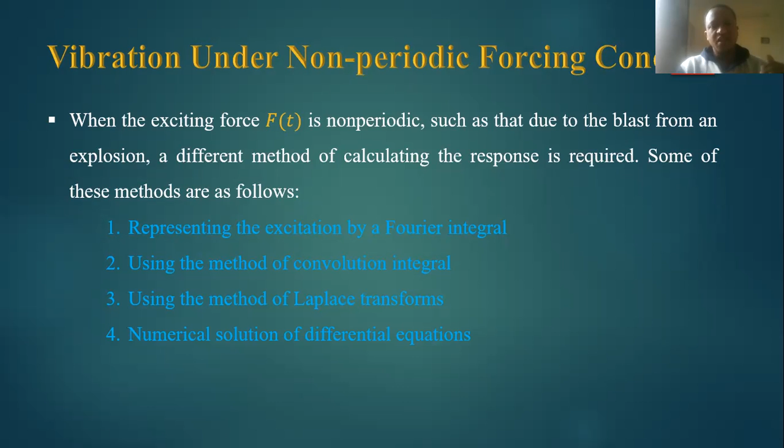Let's see. In our previous case, especially for the regular forces, we have seen the Fourier expansion. We used the Fourier integral method, and we implemented the Fourier cosine and Fourier sine solutions for the solution of the force. So this is a review of the previous lecture, one slide review.

When we see the periodic force, any general wave can be represented as a Fourier series, which is a superposition of harmonic components of various frequencies. For example, this is the force: mx dot dot plus cx dot plus kx is equal to f of t. This is a general equation of motion.

We also have a Fourier expansion, that f of t equals a naught over 2 plus summation of ai cos(I omega t) for I from 1 to infinity, plus bi sin(I omega t) for I from 1 to infinity. This is the Fourier expansion. This is the constant part, this is the sine and cosine part. So this is one of the representations for the harmonic component.

So the response of a linear system for this equation is found by superposing the harmonic response of each excitation. Here we can see this for two different cases: one is first order system and second is second order system.

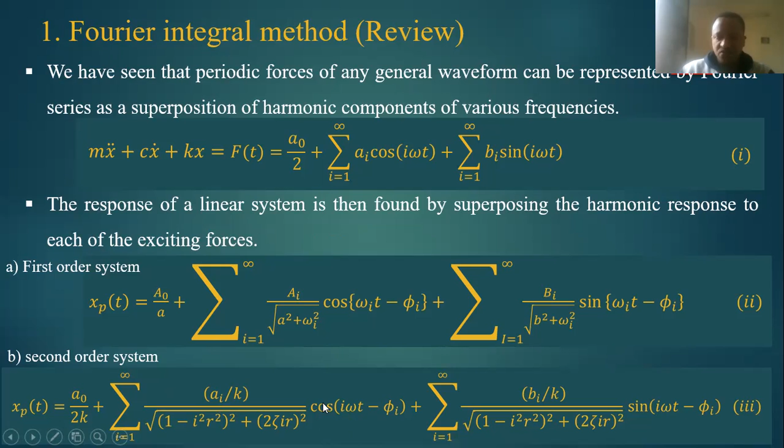So for a damped second order system, this is the solution for the periodic force case. But most of the time, the force is not periodic, it is non-periodic forces. For non-periodic excitation forces, usually the magnitude varies with time, meaning there is a change in magnitude as time goes. So for such a case, we use the convolution integral method.

The convolution integral method is the one which we use especially for the case of impulsive forces. The simplest form of this type is impulsive force, a force that has large magnitude F, which acts in a very short period of time — that kind of momentum. An impulsive force is a large magnitude of force within a short period of time, where delta t is very small.

Let x1 dot and x2 dot denote the velocity of the mass m before and after the application of the impulse f of t. Let's see some relation: F of t equals f delta t. This f of t is the impulse. We can represent this by I, no problem, or we can use a kind of p. So f of t is equal to f delta t.

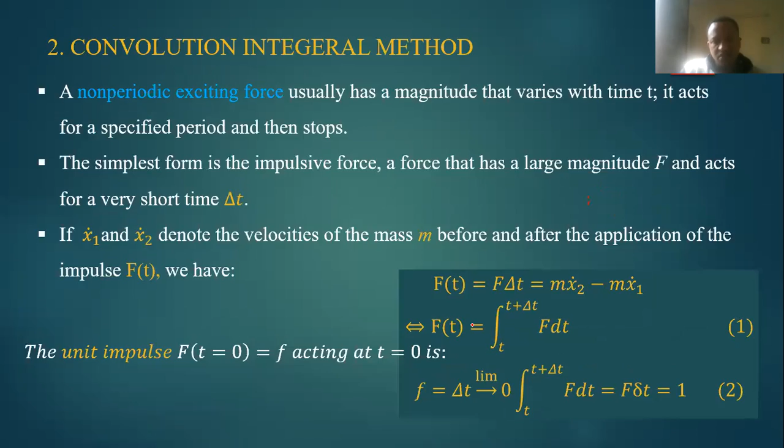There is some disturbance, it is because of my computer problem.

If the magnitude of impulse is represented as I, or we can simply take it as f of t, just f, then our x dot naught is equal to f over m. We can substitute it in the equation. So x of t equals f over m omega d, e raised to minus zeta omega n t, sine omega d t, which is f times g of t.

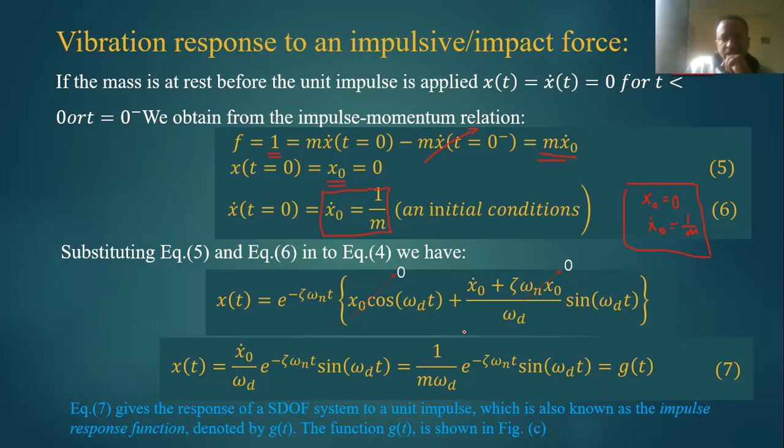So because we multiplied the initial condition x naught here — x dot naught is equal to 1 over m, and we multiplied it by f, so it becomes f over m.

Meaning if the impulse is different from unit, there is some magnitude. The previous expression is only for unit impulse. But if the magnitude of impulse is different from unit, having some f unit, x dot naught is equal to f over m rather than 1 over m. So then our expression in equation 7 becomes f over m omega d.

So this changes. So if the impulse I is applied here, this I means f. I'm just using f, not to cause any confusion, instead of I, I am using f.

So this is applied at an arbitrary time as shown in figure A. Previously what we discussed is it applied only at time t equals 0. But at some arbitrary time, after some time period t, the impulse happens here. This is delta t, the moment of happening of the impulse. So f delta t is equal to f, but in the previous case, f delta t equals 1 there.

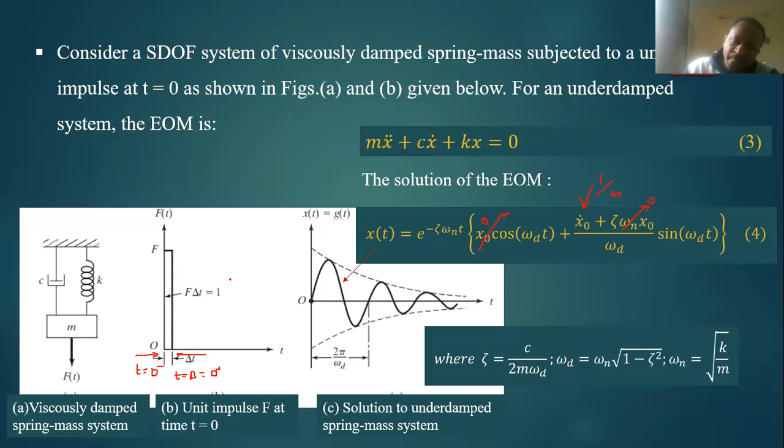That is the difference. So f delta t equals f means this here, but for the unit impulse case, f delta t equals 1. In a recent case, f delta t equals f. This is the response for that — impulse applied at an arbitrary time tau.

Or we can take some time period, and the response starts from this moment. This is the response, and we have the envelope of this thing also. Someone can draw it like this. This envelope represents the expression e raised to minus zeta omega n t — omega n t is this envelope.

Let's take an example of a structure subject to impact load. In various testing of structures, an impact hammer with some load, an impact load cell to measure the impact force, is used to cause excitation, as shown here. Assume the mass of the impactor is 5 kilogram, not the mass of the structure, it is the mass of the impactor.

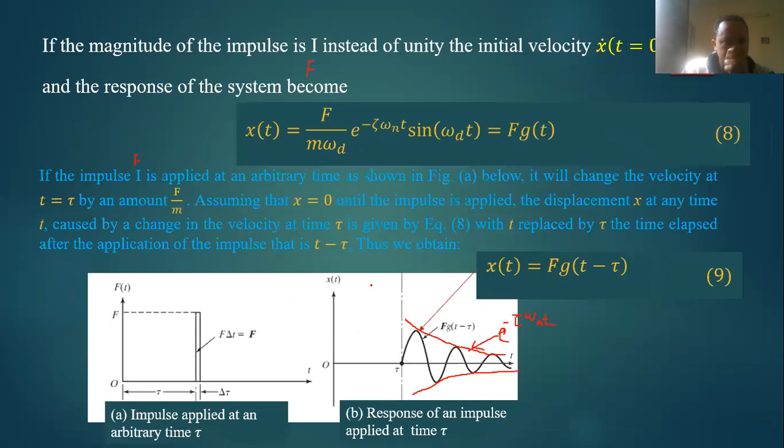Let's assume single impact charge at t equals to 0. So F is already given with magnitude of some value, and at this moment we can substitute only the values. M is known, omega D is obtained from omega N. The omega N is root K over M. So we have this omega N, the natural frequency.

And the damping ratio is C over 2M omega D, so for that, which is equal to C over 2 radical Km. So we can get the damping ratio, it is a unitless quantity. And the damped natural frequency is equal to natural frequency times the square root of 1 minus zeta square, which gives us this value.

This means the value of natural frequency and the value of damped natural frequency are almost at the near point. This is very near to causing resonance. Resonance means if omega d over omega n is equal to 1, that is the point of resonance. So they are almost near.

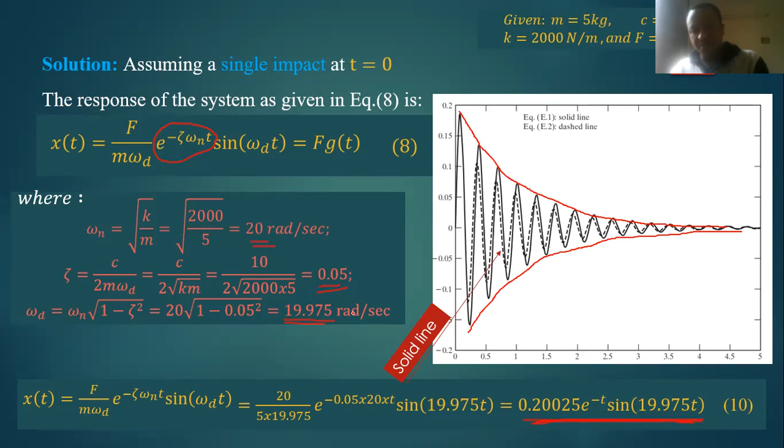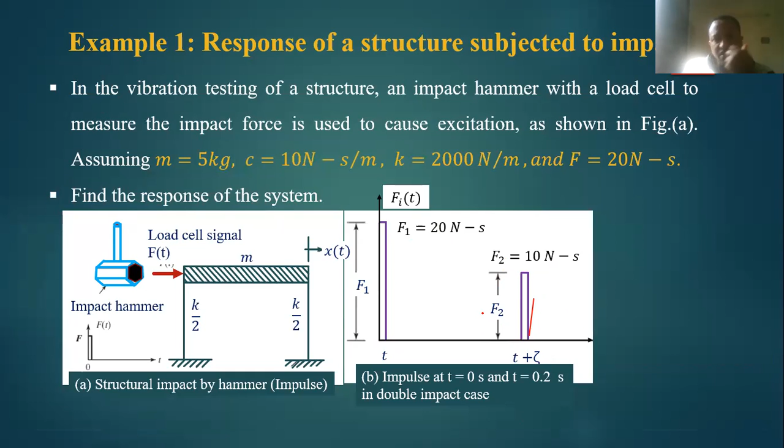So what will happen if there is a double impact? For example, here there is another impulse happening. F1 is the first impulse, F2 is the second, another impulse. So how can we represent this second impulse? T0 means the first impulse moment, and T greater than 0.2 seconds is when another impulse happens.

So for that, we use the summation of Fi over m omega d, e raised to... This summation implies the effect of the first impulse is taken into consideration, and then the second impulse. If there is another third impulse, we sum up all of them. So instead of t, we substitute t minus zeta for the time period. Finally, we can get f of t is equal to f1 delta t plus f2 delta t. This delta t is the Dirac delta function, as I said.

So x1 of t is equal to f1 over m omega d, e raised to... where zeta is 0.05, omega n is 20, so zeta times omega n gives us 1, so it is by default there. And another one is similarly, instead of t, we use t minus the time period. So this is for the second impulse.

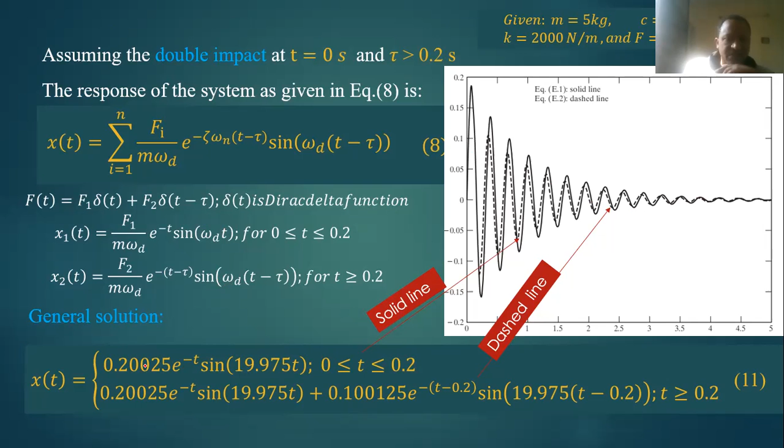If the impact is elastic, then the impactor, once it collides with the structure, rebounds. Or if it is inelastic, the smaller mass will stick together with the bigger mass and move together. So there are two probabilities here.

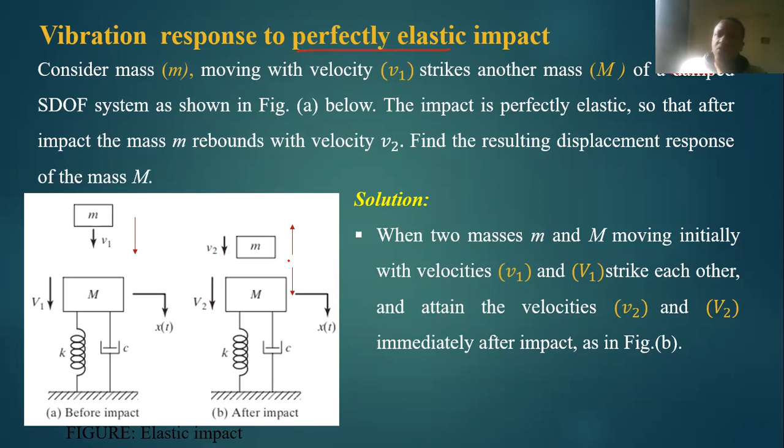So when two masses, m and M, moving initially with velocity v1 and capital V1, strike each other and attain the velocities v2 and capital V2 immediately after impact, as we can see from B here. This is the after-impact process. It can move down again, or it can reverse.

To solve this problem, we must apply two principles: the principle of momentum conservation, and the principle of conservation of kinetic energy. In perfectly elastic collision, both momentum and kinetic energy are conserved because there is no energy loss in the system. But in inelastic collision, momentum may be conserved, but kinetic energy will not be conserved, because there is an energy loss.

This means the kinetic energy is converted into damage energy in the system — they stick together, one body is damaged and the other is inserted into it, and they move together. So in the perfectly elastic case, we consider momentum conserved and kinetic energy also conserved. From that, we get this relation.

From momentum conservation, we have: impactor mass times initial velocity of impactor minus final velocity of impactor equals minus mass of structure times initial velocity of structure minus final velocity. Here, subscript 2 represents after impact, and 1 represents before impact.

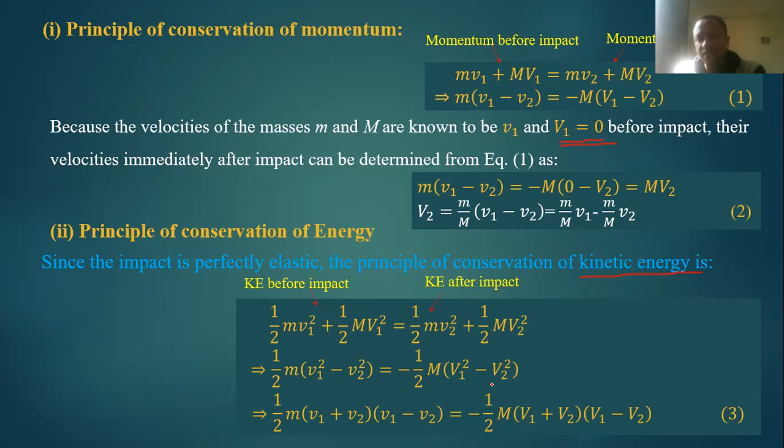This means the structure will not be damaged. So from the above equations, we can finally find v1 minus capital V1 — where the initial velocity of structure is 0 — which equals minus of (v2 minus capital V2). This finally gives us the initial velocity, since it is known, of the impactor, equal to the final velocity of the structure minus the final velocity of the impactor.

This is our second equation, equation number 4, which indicates the magnitude of the relative velocity of the masses remains constant. From here, the relative velocity of one mass with respect to the other — this is also the final relative velocity — remains constant, and only the sign changes. You see, there is a minus sign here, because of which there is a sign change during perfectly elastic impact.

So the solution of equation number 3, our kinetic energy equation, combined with equation number 5, gives us the impactor's final velocity equal to (impactor mass minus structure mass) over (impactor mass plus structure mass), times impactor initial velocity. We express this in terms where v2 of the impactor and V2 of the structure are unknown — the only known parameter is v1. The masses are known, so these are all known parameters, and from that we can solve.

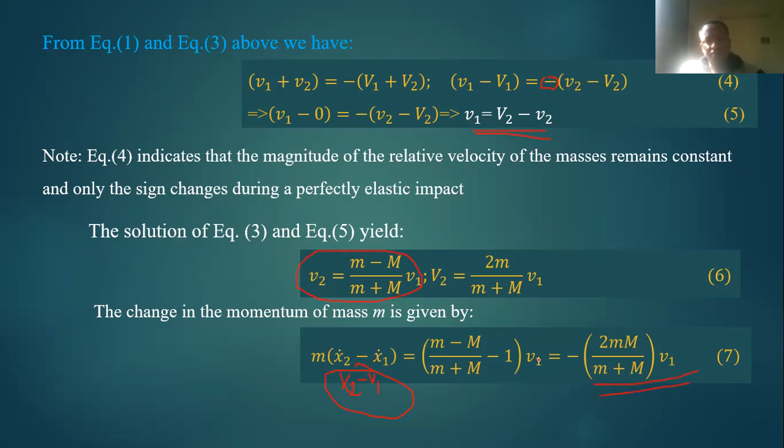So for the impulse applied to the mass m during the impact process, F equals integral from 0 to t of f(t) dt, which is equal to the value given in equation number 7. So F is equal to this.

Now let's go to the equation of motion. From Newton's third law of motion, the impulse applied to the mass m during impact will be the same as, but opposite in sign to, the impulse applied to mass m of the impactor. So mx dot plus cx dot plus kx is equal to f, so that f is equal to this, the impulse.

So finally, what will be the equation of this type of expression? That means mx dot plus cx dot plus kx is equal to minus 2mM over (m plus M), the whole times v1 delta t. This delta t is the Dirac delta. So this expression is equal to this expression.

So the solution from our previous lectures becomes this one. So f is this, you see, instead of f we can substitute this thing. Yeah, this is f. There is some minus sign here that I didn't use, okay, but it is there, minus sign. This is the solution.

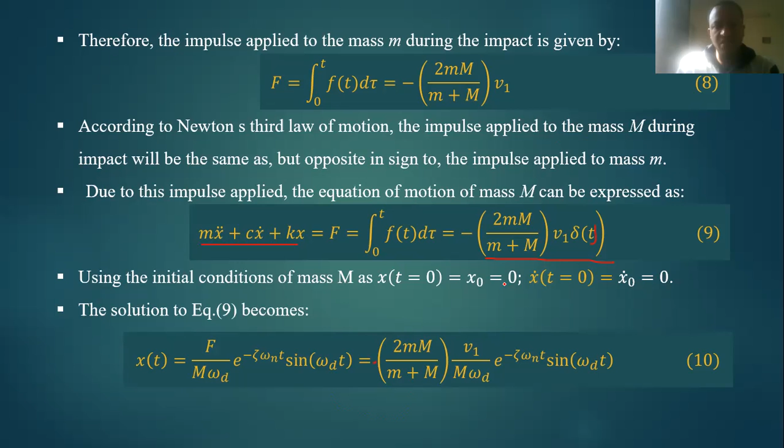Now, once we understand perfectly elastic collision, let's go to inelastic collision or impact. Vibration response to inelastic impact, that is another second case.

So let's consider mass m moving with velocity v1 strikes another mass M of a damped single degree of freedom system, as shown here. This is the impactor mass, this is the structure mass, and this impactor comes and impacts the structure, and both of them after impact go together, stick together here. Here, the two bodies stick together because the structure is damaged. For example, this impactor damages the structure and embeds into the system, and they move together.

So during this time, what will happen? Look, in this case, the change in momentum is equal to impulse. Okay, momentum conservation happened, but kinetic energy will not be conserved in this case. So the change in momentum, which is equal to m v2 minus m v1 for the impactor, is equal to the integral from 0 to t of f(t) dt.

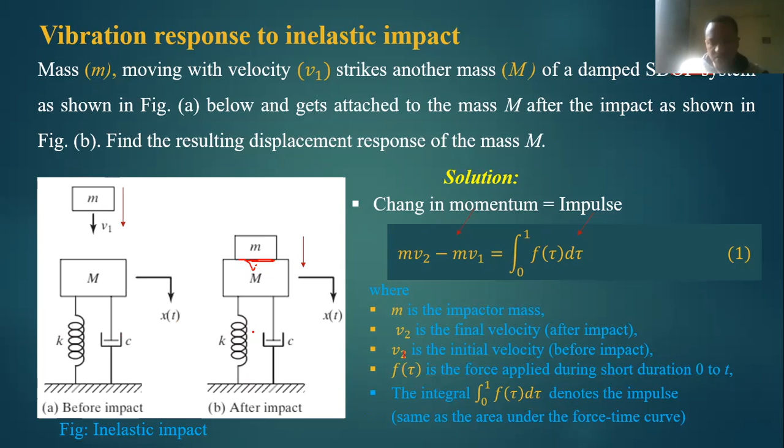This is the impulse, where m is the impactor mass, v2 is the final velocity of the impactor, v1 is the initial velocity, f(t) is the force applied during short duration, that means impulsive force, and the integral of this denotes the impulse. Okay, so let's see that.

Since the mass m gets attached to the mass M, the structure mass, after impact, the impact can be considered to be perfectly plastic or inelastic impact. The two masses move together and are considered to be subject to impulse with change in velocity of mass. So from that, the impact force f(t) is internal to the system and can be assumed to be 0.

Okay, so from equation 1, we have m v1 plus M v1, which is equal to (m plus M) times Vs. At this time, m plus M, both masses together, have a common velocity. Vs is the common velocity, common for the structure and the impactor after impact. So Vs is equal to (impactor mass over impactor mass plus structure mass) times v1.

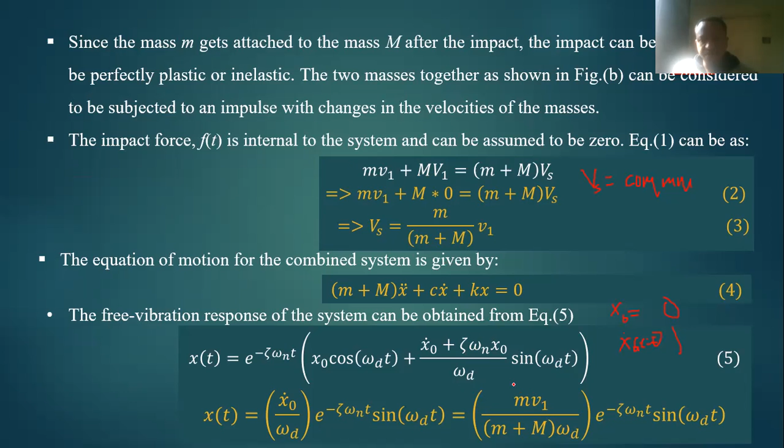Another important thing, the third case is the numerical method. Most of the time we express differential equations in terms of numerical methods, because the analytical methods discussed so far are somehow tedious in some cases. So in order to solve such tedious analytical equations, we use numerical simulation methods using various softwares designed to handle such numerical methods. Among them, we use the Runge-Kutta method as one of the numerical methods.

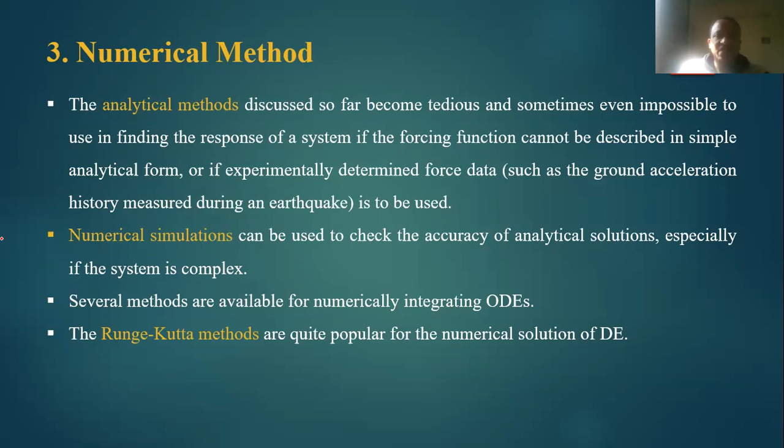So in the Runge-Kutta method, we reduce the second order differential equation to a first order differential equation. It has a lot of useful applications. So how can we do this? With some prescribed initial conditions: x at t0 equals x naught, and x dot at t0, which is x naught dot. These are the initial conditions we use.

Then how we can reduce it: we let, for example, x1 of t equals x of t. Then x2 of t equals x1 dot of t, which means x dot of t. So x2 is expressed in terms of the first order. That implies x2 dot of t implies x dot dot of t.

So the dynamic equation, m x dot dot of t, equals cx, we bring it back: minus c x dot of t plus minus k x of t plus f of t. Once x dot dot of t, meaning x2 dot, we substitute this part here. X dot of t means x2 of t.

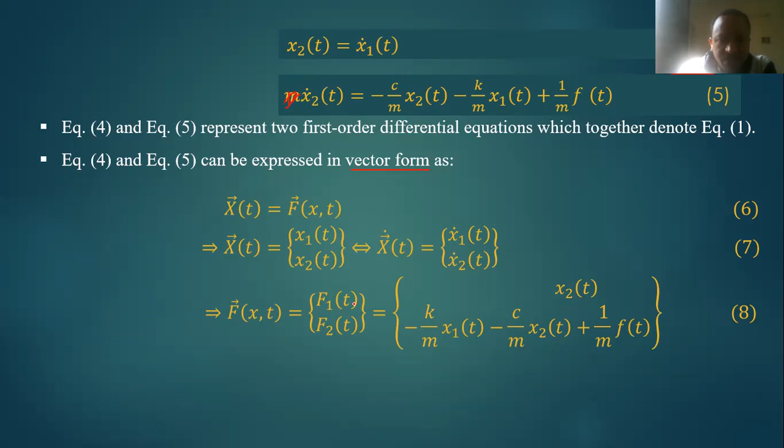From these two equations, we can express this in vector form: vector x dot of t equals f of vector x of t, involving force and other quantity combinations. So x of t equals x1 of t and x2 of t, which implies vector x dot of t equals x dot 1 of t and x dot 2 of t. This is the representation for the two equations in matrix form. Finally, f of x, t implies f1 of t and f2 of t, where f1 of t equals x2 of t, and f2 of t equals minus k over m and the other quantity terms substituted in.

Then the solution using the Runge-Kutta method leads to an expression like this. In most numerical methods, improved methods are presented such that x of t at iteration i plus 1 equals xi plus delta xi. Here, xi plus 1 implies x at time t equals ti plus 1, and xi implies the current time t equals ti, plus the increment added to ti.

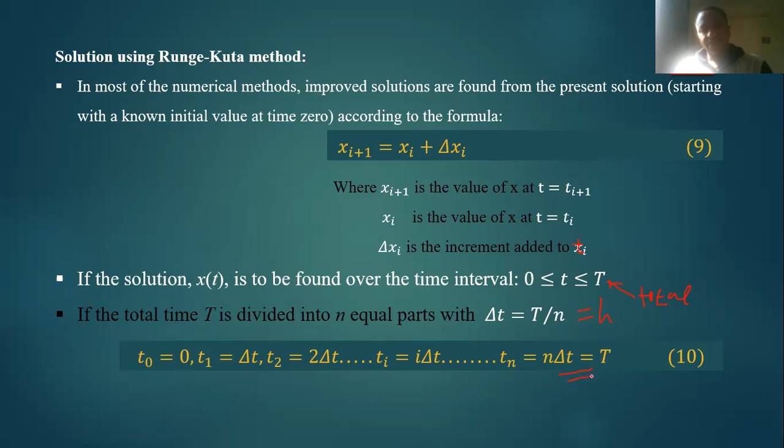If the solution x of t is to be found over the time interval from 0 to the total time t, then the time t is divided or discretized into a small incremental time delta t, sometimes given as h. So we discretize it: t naught equals 0, t1 equals delta t, t2 equals 2 times delta t, t3 equals 3 times delta t, ti equals i times delta t, and tn, which equals t, equals n times delta t. This is the method of dividing time in order to get the appropriate iteration.

In the Runge-Kutta method, the approximation formulas used for obtaining the solution for xi plus 1 from xi is made to coincide with the Taylor series expansion. So this is the Taylor series expansion of x of t plus delta t, which is equal to xt plus x dot of t delta t plus higher order derivative terms.

Most of the time we truncate the higher order terms and consider them as error terms, or order of delta t terms. These error terms are neglected, and we give emphasis to the lower order terms in this Taylor series expansion.

Let's consider the fourth order Runge-Kutta method, which is most commonly used. So for that, what can we do?

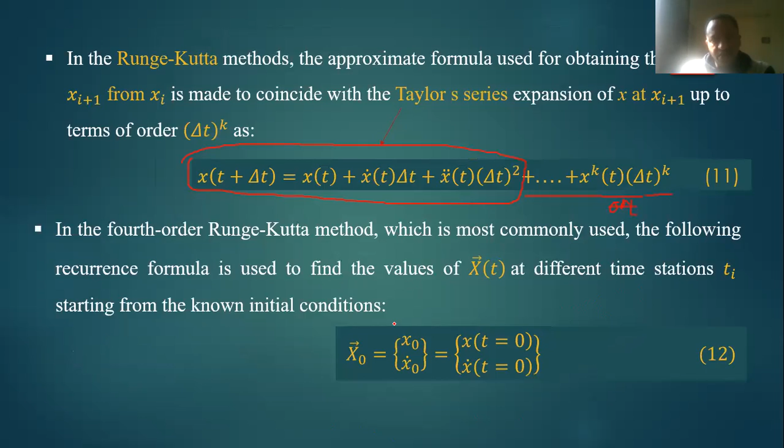Here del h means h implies delta t. f of xi, ti implies these quantities, let me show you this quantity, f of xi, ti.

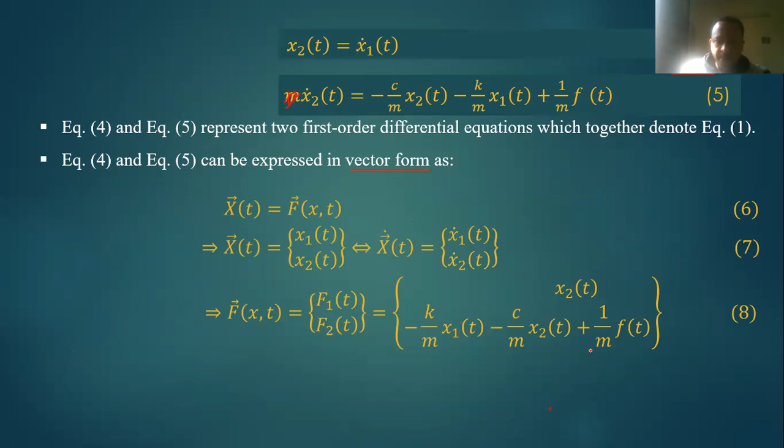So k1 equals h times f of xi, ti. k2 equals delta t times f of vector xi plus one half k1, at ti plus half h, meaning half delta t. Again, k3 is expressed in terms of k2, and k4 is expressed in terms of k3, similarly. And the final time is ti plus 1, still based on ti.

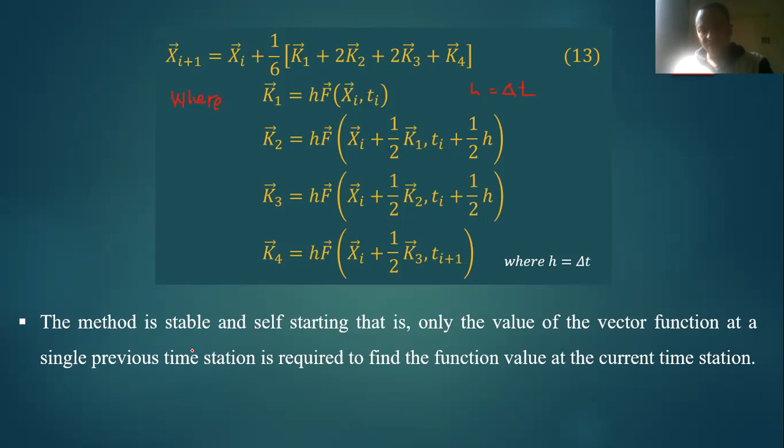So this method is stable and self-starting, meaning only the values of the vector function at a single previous time station are required to find the function value at the current time station.

Let's take an example, a response using the Runge-Kutta method. For example, we have this equation for a single degree of freedom system subject to a force with this type of equation. F of t is given like this. So this is M, this is C, this is K, and this is F.

The initial conditions are x naught equals 0 and x dot naught equals 0. Both displacement and velocity initial are 0. The total time is considered 20 seconds, that is the total duration that the impulse force acts, and we discretize this time into 400 steps, meaning n equals 400.

Actually n is equal to 400. What is delta t? We can find delta t, which is equal to total t over n, that means 20 over 400, giving delta t equal to 0.05 second. This is the discrete time interval over which the analysis will be carried out.

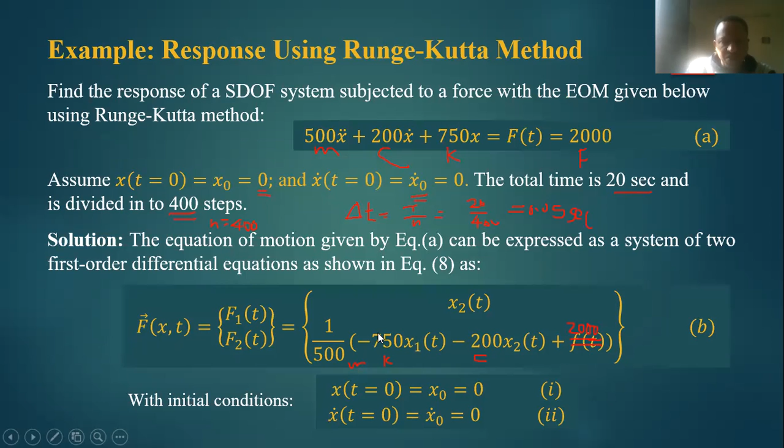So where do this x1 and x2 come from? From this equation, x2 and x1 are expressed in terms of each other. So this is all about this part of the solution.

In the next session, we will cover second order systems, meaning vibration of 2 degrees of freedom, and we will go on to multi-degree of freedom vibration next. Thank you very much for watching.